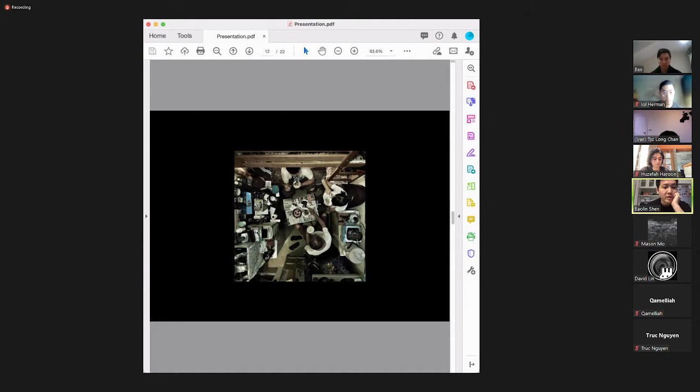And with this dense population of cities, what are the implications? Problems with traffic congestion, housing problems where because of the demand, housing prices are driven really high, and people can't afford to even purchase or live in a comfortable space. People are forced to squeeze into small spaces, as you can see here.

So for us, the studio begins with looking at the problem. First we want to discuss the problem we face within the cities, then discuss what challenges will happen within the cities regarding space, and finally propose a spatial negotiation. In the first place, we really want to look at the dense city problems.

But as we stepped into a more customized approach with the students, with Huzefah, we began to discover that in her own country the problems we're dealing with are slightly different. And then the project starts to evolve. We start to re-identify the problems with the city, and then propose methods and strategies to negotiate with the space. Yeah, and with this I'll hand the presentation to Huzefah.

Hello everyone, I am Huzefah. I was part of Paul and Clark's spatial negotiations prototypes. As we started the course, I reside in Karachi, Pakistan, so it is one of the densest cities, as Paul has mentioned. When we started, overall we studied the city and its density along with its problems.

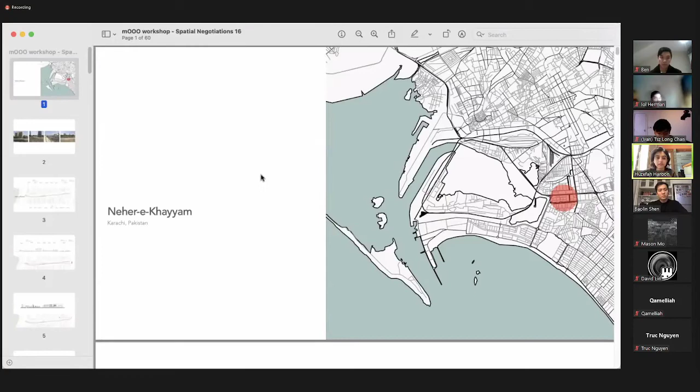So this is one of the areas — this red spot indicates where it is. This was initially a natural drain which goes into the sea, but eventually it started getting dumped with sewage water. There was a project in 2018, held by various architects, to revamp this entire strip of the stream, to box the sewage drainage into a box drain and leave this as fresh water where public interactions can happen.

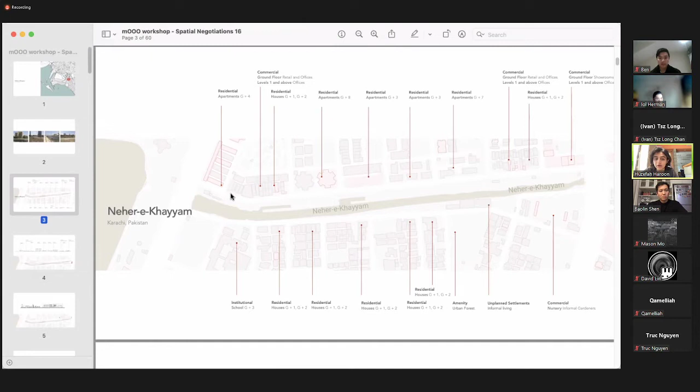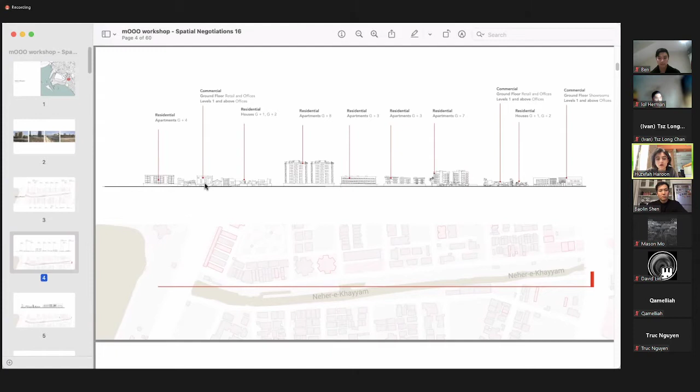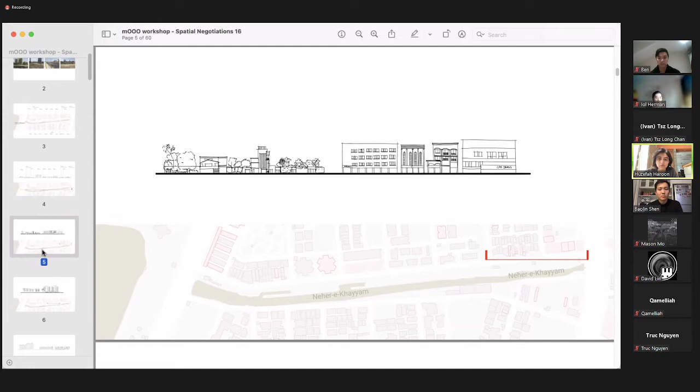This is the current condition of the Neher and the stream along the entire strip. It's a 1 kilometer strip where different multifunctional residential and commercial architecture typologies run parallel to the entire length of the stream. This is the elevation scape of the entire 1 kilometer strip — some housing typologies as well as commercial buildings. The entire strip is mixed use, with residential as well as commercial activities happening along it.

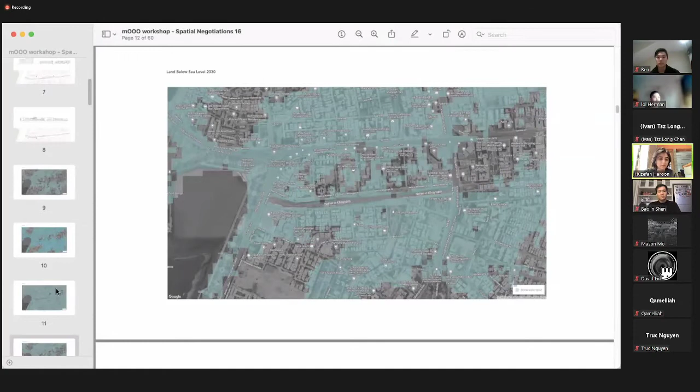This is the land that would be below sea level in the next 9 years, 8 now. This is an image showing the condition of this area during the 2019 monsoon. This entire strip was submerged in water by approximately 1 meter.

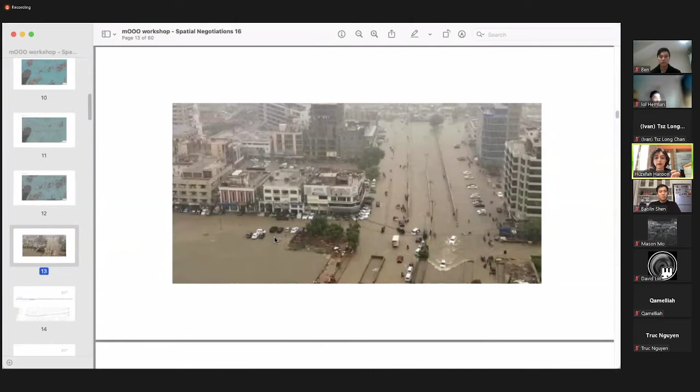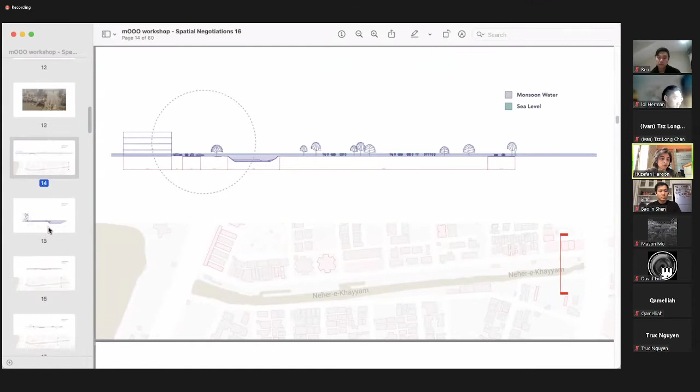This area is blown up to show the activities that happen in this section. This is a commercial activity building where, in each of the cases, the water actually overflows into the buildings.

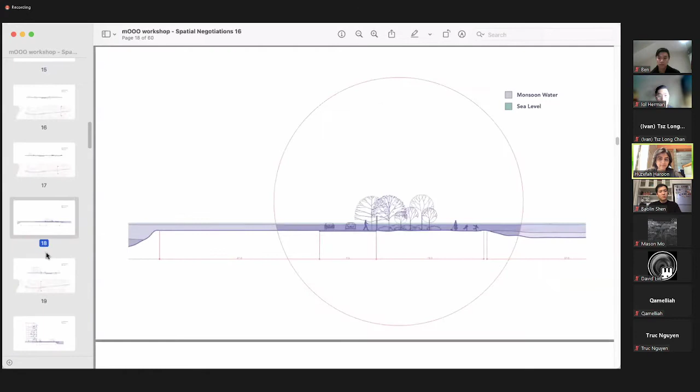So in all of these sectional studies, it was identified that there were 2 aspects happening. One, the housing typology's ground floor became completely inaccessible. At the same time, the overflowing of the stream within the center of this streetscape blocked access to these areas.

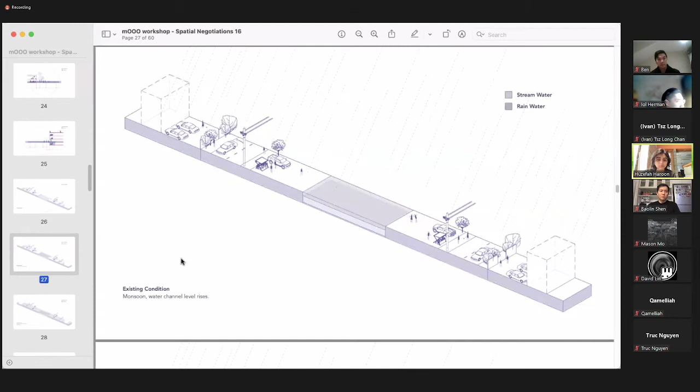This is the existing condition, an axo of how it changes as monsoon happens. As the monsoon starts raining, the water level within the channel starts rising. Also, all the water accumulated within the building areas and the road gets collected within the central stream.

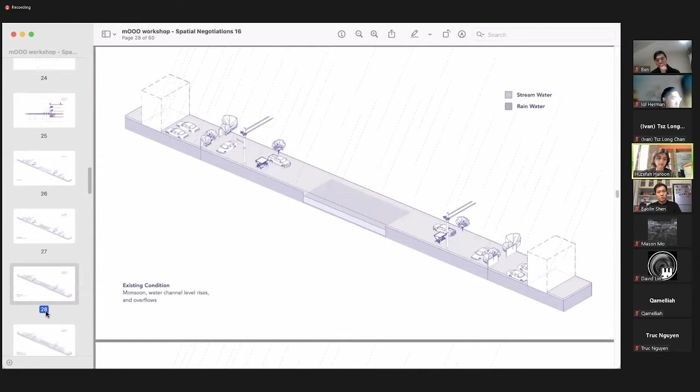As it keeps raining, the Neher gets completely filled and the water overflows onto the roads and private properties, to the point where things become immobile and inaccessible.

So in order to gauge and identify what can be done, there were 2 interventions. The interventions and possible solutions are divided into 2 aspects. One was the landscape aspect.

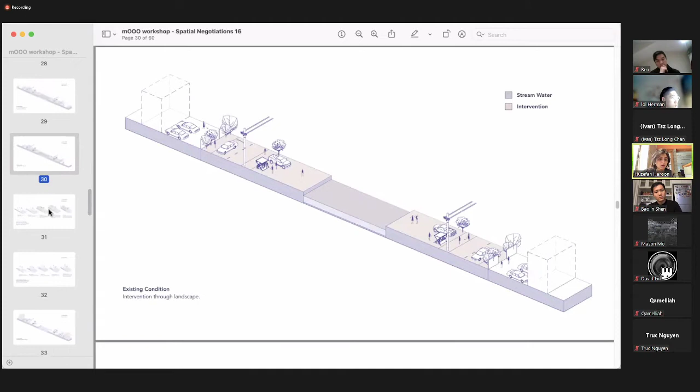Further, the landscape aspect was explored in different ways, looking at possible situations where this can be redone so it acts as a point where public interaction with the water remains, but at the same time also acts as a protective barrier for any water that overflows.

So this is the existing condition. These are multiple ways one can block the water from overflowing into the road, the landscape, and the private property. So a hard boundary is something that can be made.

The other are variations of how landscape can be a softer boundary, where landscape can change levels in a way that creates constant interaction with the water, but at the same time keeps the water at bay.

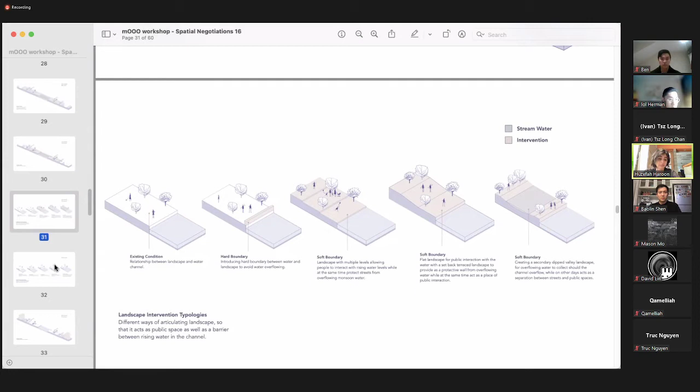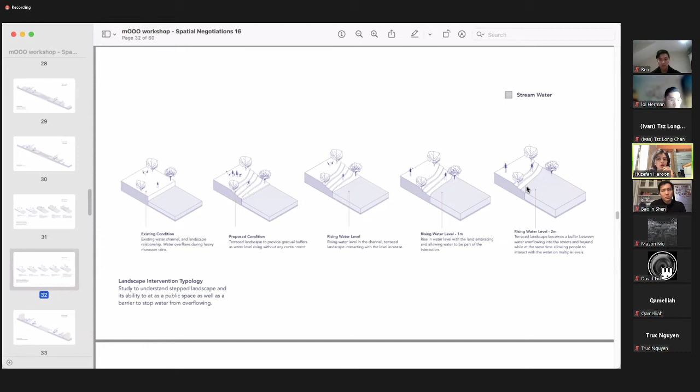So I picked the soft boundary element to develop the iteration of the landscape intervention. This is the axo analysis of how the water, if it keeps rising, gets blocked, but at each level as the land recedes and the water overcomes it, there's still retention of public interaction. At the same time, this water doesn't overflow to other areas of the street.

The second intervention identified was the housing typology and how that can be redesigned or rethought in order to keep it accessible. While the monsoon condition is temporary, rising sea levels are something that still need to be thought of, and how it can remain accessible while the ground floor level can still be used.

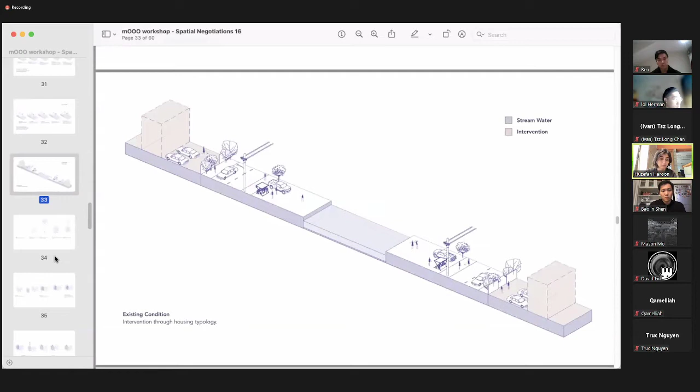So this was an understanding of how a mass can be broken into structure and volumes, and how circulation can be separated from it, where the circulation becomes like scaffolding, flexible enough to change with the times, and functionality can be added to it.

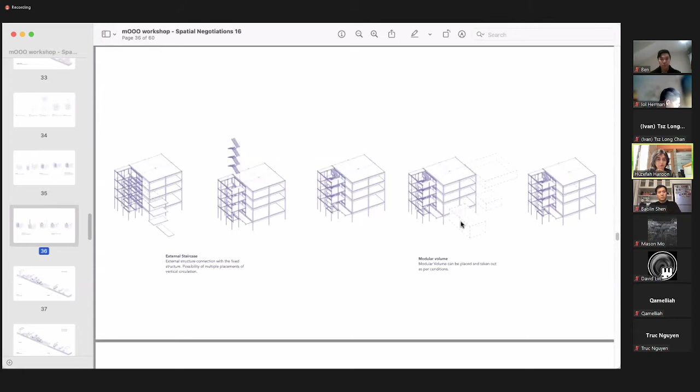So it's a plug-in system where volumes can come in according to the requirement. Let's say if half of that entire square feet is needed, it can be plonked in. A quarter of the space can also be used, and the full floor can also be used. So this was an understanding of how the housing typology can be thought of.

But housing typology itself has been identified, with the roof being the one factor that can be explored - if we lose out on the ground floor function, can the roof be activated to perform the function that the ground floor is performing?

At the same time, because there is no rainwater collection happening, a lot of water gets accumulated and wasted by collecting within the central stream. So maybe some kind of storage can come in within the housing typologies to reuse that fresh water.

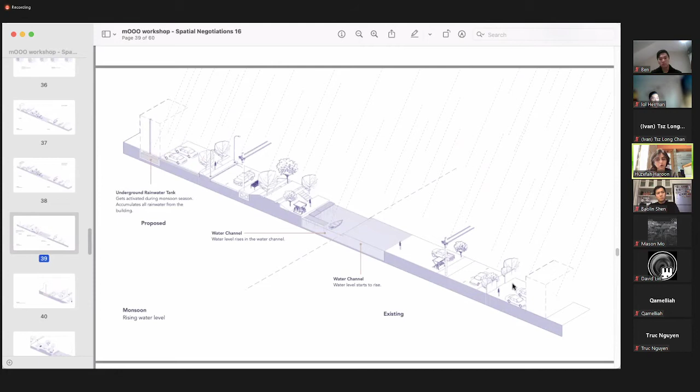At the same time, in the existing condition, the water level is rising faster because all the rainwater that gets thrown onto the road and the building gets accumulated here within the stream.

So these are just some activated areas further zoomed in, showing how the water keeps rising as the monsoon happens.

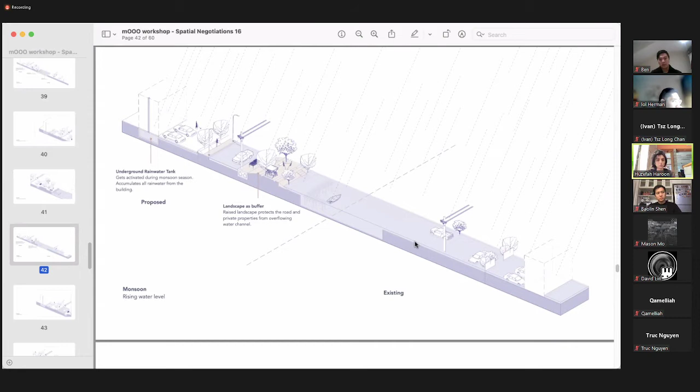This is where the storage tank overflows, but at the same time, this water starts getting over the landscape slope that's there. In the existing condition, if these interventions weren't there, the road and the private areas would still be inaccessible.

This is one of the last final resorts for the monsoon. So in case the road also gets overflown, the scaffolding system can come in where a sky bridge or a walkway can be made, whereas monsoon emergency barriers can be blocked so road water doesn't come into the property areas.

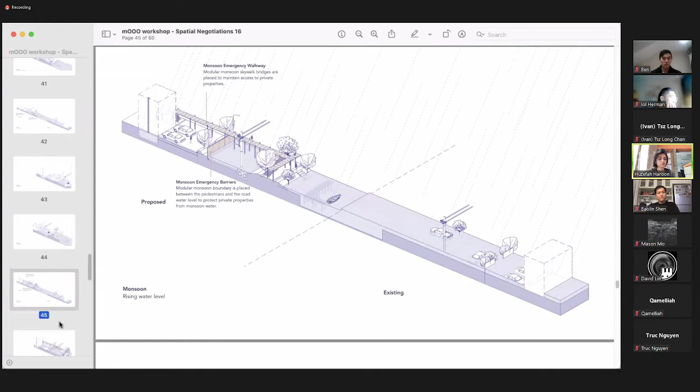This is an overall strategy. So with changing time, the interventions need to allow for changes and flexibility to happen over time. So all of these highlighted areas, such as the pier, are introduced in larger forms of steps.

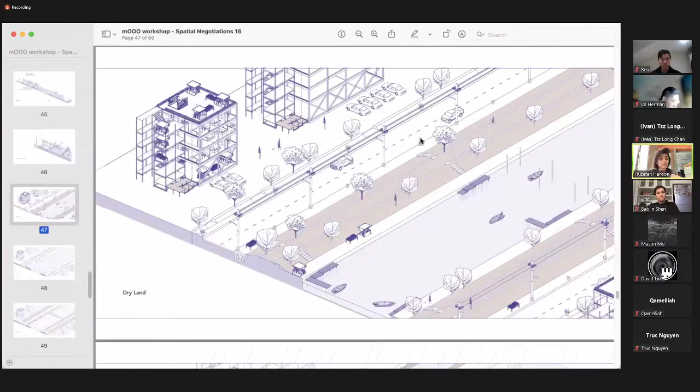Which can act as platforms for the boats to come in eventually at different levels of water as it rises. At the same time, these areas, which are the foundation supports for street lamps and posts, can alternatively act as seating elements in a dry land situation, and the landscape acts as an interactive element.

As the situation further changes in monsoon, again, the emergency barriers can come in and get activated. Once the sea level rises, a lot more long-term situation is needed.

So the roads and the sky bridges become an elevated area where interaction can stay, while the mode of transportation primarily now becomes boats. And this staggered pier acts as a platform for people to still let the building be accessible.

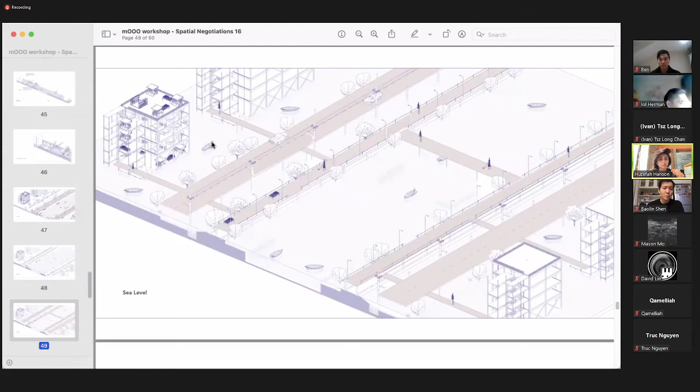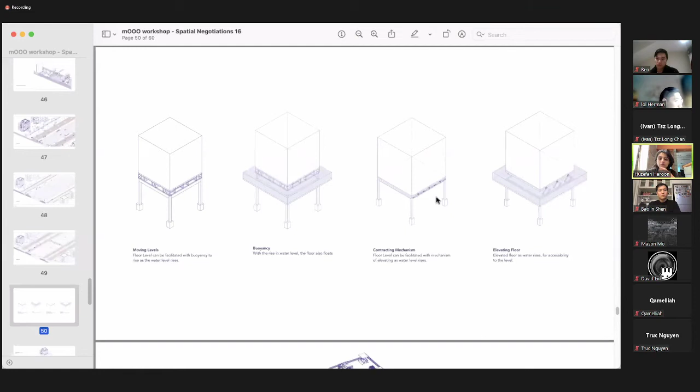This was a further intervention into how one can also keep the ground level accessible to some limit. So what can be those mechanisms which can lift the floor level as the water comes in. So these were the interventions that were thought of.

This is the housing typology, where the roof gets activated again. This flexible vertical structure becomes an area which acts like a vertical streetscape.

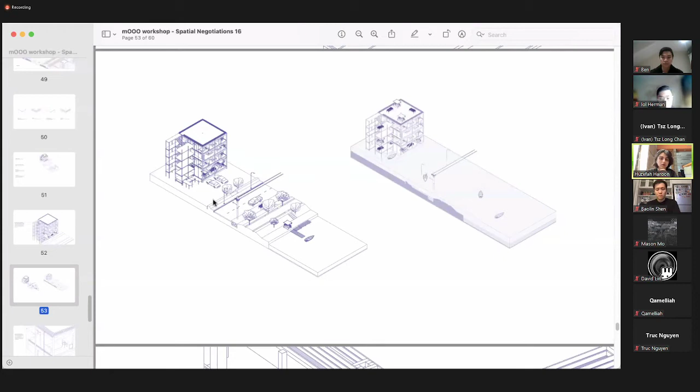This is a comparative of how the dry situation changes as the sea level rises, and how the ground floor gets lifted as the sea level rises so it remains accessible. This pier gets submerged, but there's still this platform which can be accessed by boats.

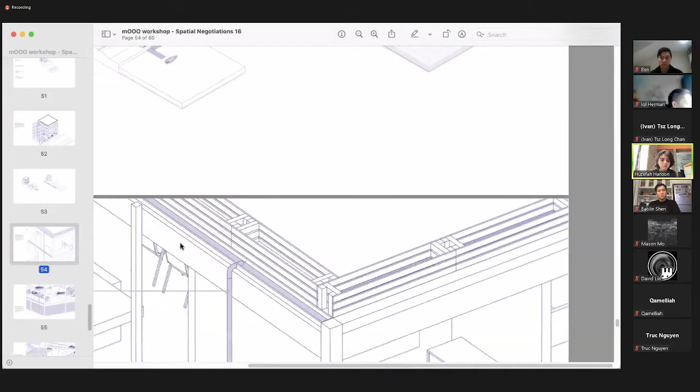Then this is the water collection system, where it gets stored in the tank underneath.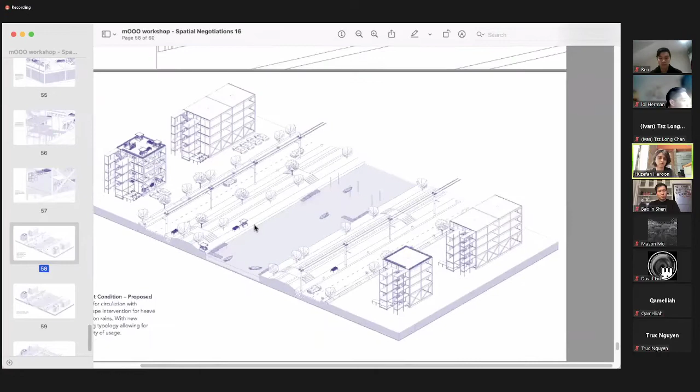This is the overall scheme, which shows the proposed current condition within a dry situation, what happens when the monsoon comes in and rainwater accumulates, and how the entire fabric of the cityscape changes as the sea level rises.

So this is the research that's been done so far. Thank you.

It's great, yeah, great project. Great presentation.

So basically what we did is more of a research project that we chose. We began by trying to identify a very local problem within Karachi, where Huzifah lives, and then slowly narrowed down the landscape until we decided to focus on one section strip, where you can interact with the water, with a bit of housing, to really focus our attention on the design.

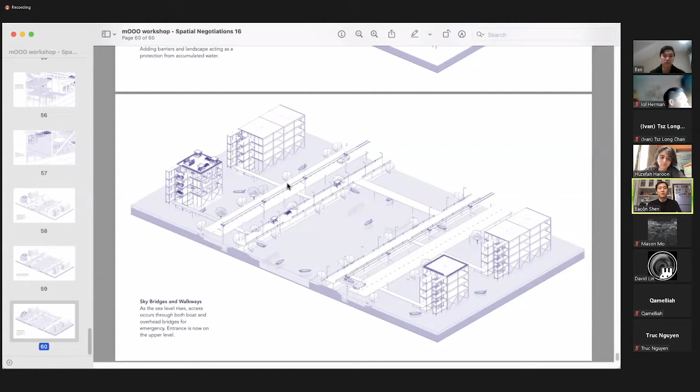And then there are two approaches we've shown here. One is more of a framework, landscape part, where we design how the bigger landscape interacts with the changing sea level. And then the other portion is more focused, on how the residential component is also a flexible system that deals with the unforeseeable changes in this changing future.

And at the moment, I think we've really set up the framework for the research, where each portion can be focused on further, to go into more detail to resolve the kind of details where we talk about flexible architecture or flexible structure, how things can interact with each other. Yeah, I think that was our research framework and goal.

Let's see if any other tutor has comments.

I have some questions for you, but I can wait till the end. I have some questions as well, but I'm sure you have looked at it.

So have you guys also studied floating structures? Structures that will float when the water comes in. They're smaller scale, but anchored to the ground.

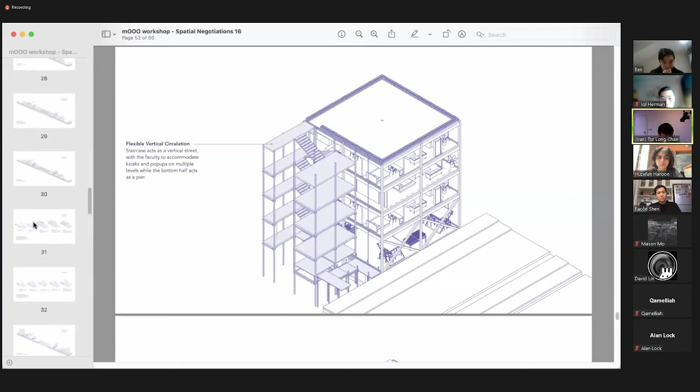Also just a few questions. I think the presentation is really clear, I got the idea, and the drawing is pretty clear as well. But maybe you have it in the beginning, which I might have missed, but maybe it's some data, like how high the sea level will be, the water level when it's flooded. Maybe you got it already.

Let's say if you have all these buildings which almost serve as a water tank for the water to come in—I know you are just focusing on one stretch of area, but it might be good to look at the whole area of the city as a whole, and study: if all these buildings become a water tank, when the monsoon actually comes, can you absorb all the water? You don't have to design everything for the city, but it would be good to have a number to see how plausible the scheme is.

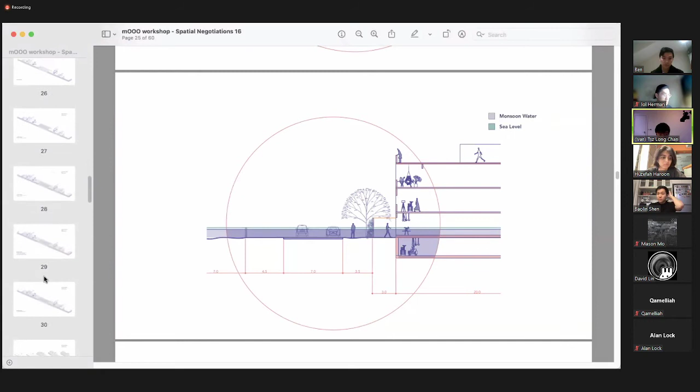And then also the idea of time, because you mentioned monsoon, which only comes maybe in the summer or something. So what happens to the landscape when it's not flooded, how do people use it? Do you have to do anything to prepare for it? And even with global warming and sea level rise—what happens, let's say in 50 years' time, when the water level becomes much higher, how does the city prepare for that? I think this kind of question can bring more to the design proposal of the project.

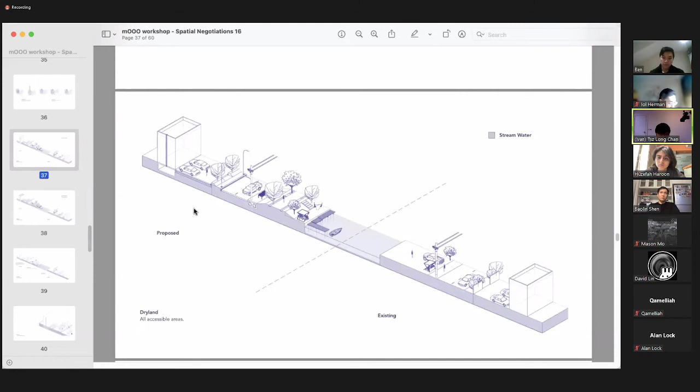I think it would also be nice—I know you're focusing on this specific stretch of area, but it would be quite nice to see the whole stretch of river and how this landscape merges into the water, and whether that's part of the landscape where you allow the water to come in and become part of the landscape as well. So yeah, I think that's my comment.

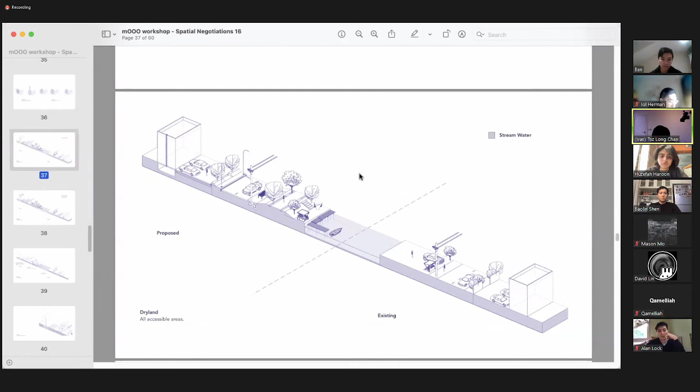Also the platforms—I think it's at the very end of the presentation, where you have these little platforms that allow people to walk on. I actually think this is really beautiful, and it almost reminds me of Venice when it's flooded, where you can see people rushing out into the city and using these platforms to get around. Because when it's flooded, people have to walk on those platforms, and it's quite interesting because they're actually quite narrow, only allowing two people to walk by each other at the same time. Sometimes when tourists are holding a suitcase, they can't walk past each other, so one person has to actually go down into the water and come back up again. I think this little nuance of moments is quite interesting as well.

So the idea is also, even the width of the platform—how wide do you think this platform will have to be? What determines that? I think that would be quite interesting to see. There's a lot of different details you can add on to the design to make it even more precise and rich.

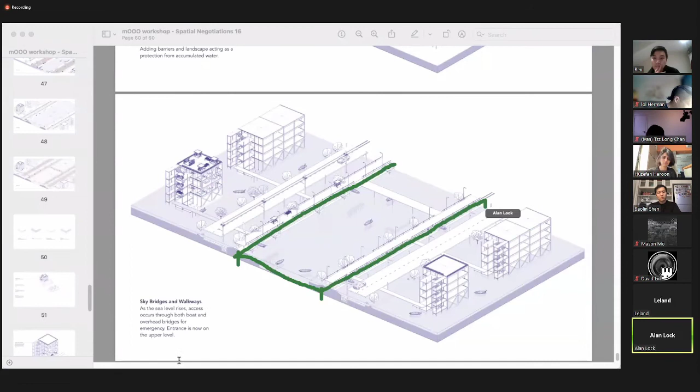So your narrative would be: when it floods, all the water that rises into our streets isn't clean water, it's basically sewage water. It's mixing with everything, becoming black water, and flooding our streets. But how do we stop it from flooding our streets? The current condition of this channel could suggest a way of combating it.

Using sponge city theory—basically, if you populate this like a green finger with lots of different foliage and plantations that, depending on your research, might have both water absorption qualities and water purification qualities, then if any water does spill out into the street, it won't be completely chemical black water. It might have some water purification properties. That's a way of combating it.

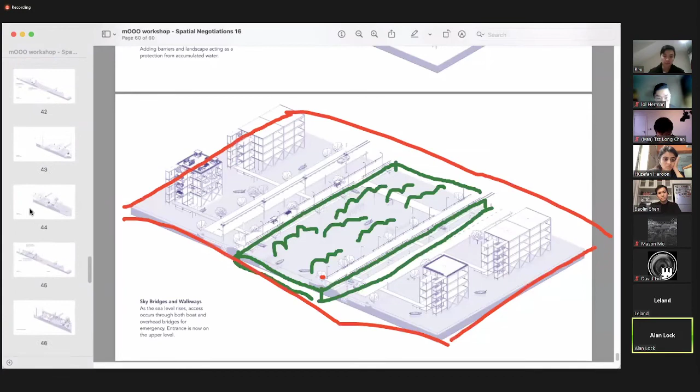You set up the whole project to say this little green thing we've put here isn't going to save the whole planet, but for this area, this 1 kilometer area, it could potentially be enough to stop flooding there. That could be an option for combating the flooding, as opposed to just accommodating it. Then you take all the options you've done where you think it combats the water and put it into a separate section.

So you open your presentation by saying it's a feasibility study filled with options. You can either accommodate it—and these are the options—or combat it—and these are the options. Then I think you have a great rounded project.

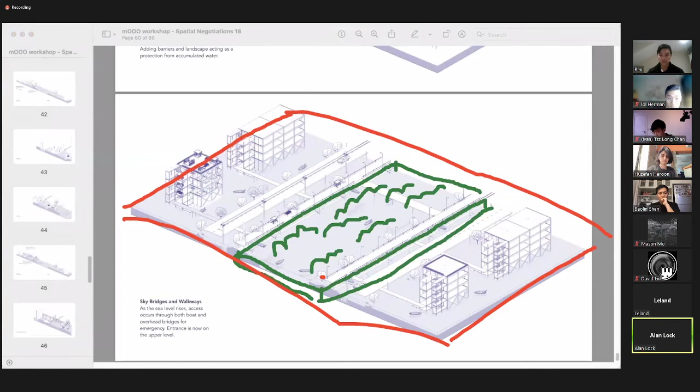Yeah, okay, I'm sorry, I forgot to mention that for the sewage water, box drains have been introduced here, so the sewage water doesn't get collected within the central stream, keeping it filled with only clean water. All the sewage water gets channeled within a proper system, which right now is lacking. So I forgot to mention that, sorry.

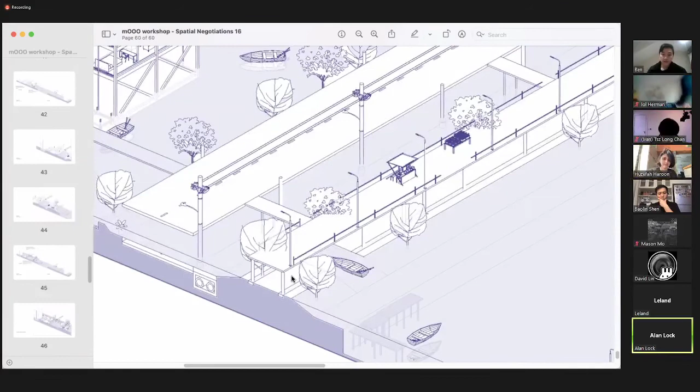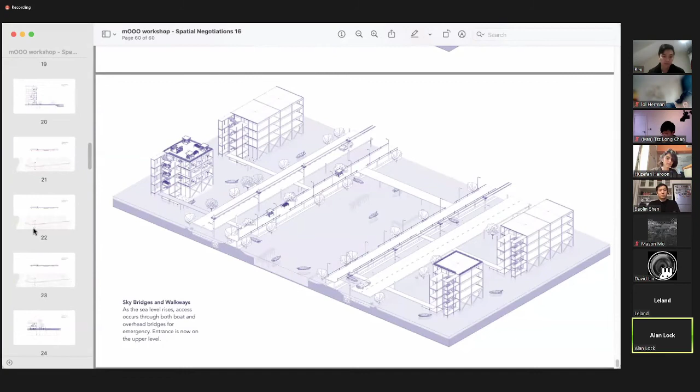But there you go—so already you open up the discussion by saying these systems already exist, but they're not super functional. One thing we could do is X, Y, Z. Therefore, the systems you put into place are not completely redundant, but they need support. That's what I think. I think if you go back to the photos you showed at the very beginning, you can't ignore the fact that the current condition is as it is. That's the current condition.

Depending on the level of flooding from year to year—and it's only for 1 or 2 months during the monsoon season, however long it is—you could start to play with other alternative options. And like the rest of the tutors were saying, maybe the interactions change from year to year. So yeah, I think it's a great project.

I would lean into the fact that it reads as a feasibility study. Okay, yeah, I do agree. It's a very good project with solid research and a proposed solution, and like Alan said, it's very, very close to being a complete feasibility study, almost like a proposal for how they could tackle flooding.

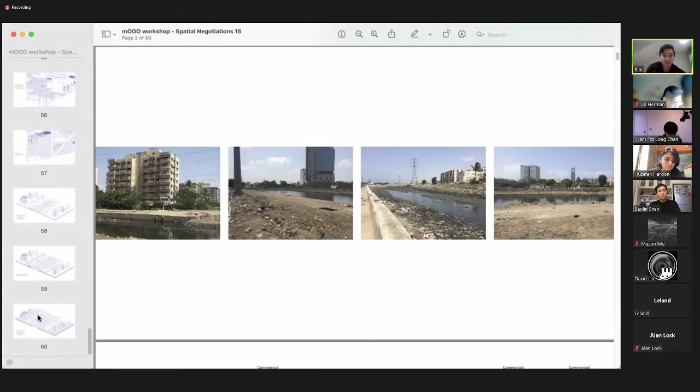I think to make it even better, you need more alternative solutions. And what Alan suggested, Sponge City, makes a lot of sense because plants absorb a lot of water naturally, and they sort of level out the flooding a bit.

I also want to address Ivan's earlier point about needing more data to support this and make it better as a feasibility study. So there's data showing global sea level rises by 3 to 4 mm per year—I just Googled this—and you could use this number to account for every 250 years, the water level rises by 1 meter.

And during monsoon seasons, it's way worse. You could take the whole area of the country, multiply by the water level changes, and get the volume of water to determine how much water tank capacity you'll need.

Right now it's almost like building a bucket around and inside this country. I think there are problems with this solution—it's a long-term fix that might work for a few hundred years, but over a super macro timescale, it becomes like a giant hole in the ground as you have to keep adding more water barriers around the country.

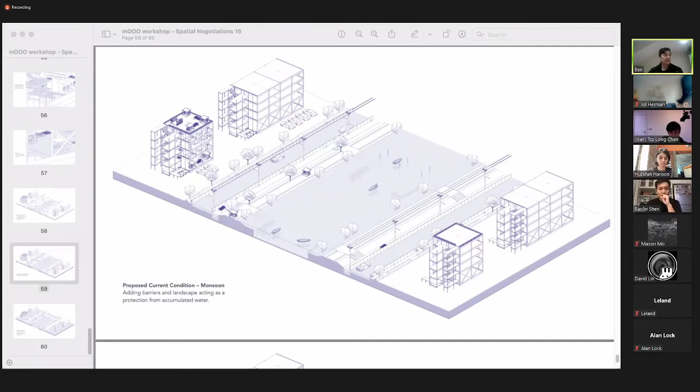So it's almost like building another layer of the city on top, by shifting the ground floor of the whole country by maybe 1 or 2 meters, and then slowly phasing out the existing ground floor as the existing first floor becomes the new ground floor.

I have a question regarding this. If the overall sea level relative to Karachi isn't that high, especially within the immediate land connected to the seashore—what's happened in recent development years is that developers have reclaimed land, adding land where there wasn't any before, bringing in islands where there was sea, which has created even more chances of flooding sooner than it would have otherwise.

This is also something I was debating—how much of the area can we actually increase the level of? Because on a larger city scale, wouldn't it be a lot costlier to raise the ground level from the sea? So in that manner, it became more feasible for us to consider accommodating the changes rather than combating or protecting the land, creating barriers, or prolonging the changes that may happen.

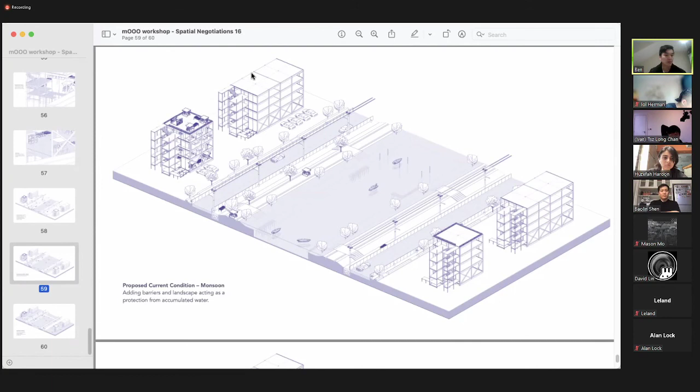If you've done the study, it would help to list these as solutions and explain why you ruled them out. So, how much soil would you need to raise the whole country by 1 meter, and you could say this much soil would destabilize the coastal area, so it's not feasible. If you include that as part of the study, it will add more depth.

Yeah, because you have already done the work, so present it. Where did you get the soil from? Just out of interest, where are you gonna get the soil from? Do you know? Is it gonna be from the building? Like if you strip off the ground floor of the building cladding, can you use the cladding to become almost like this soil?

So I think what I'm interested in is, because I think your project suddenly becomes very real, and I like the idea of Alan's idea of this sort of feasibility study. So I think this data and the numbers is really important for you to actually present to your audience, and to make it really plausible, because you're dealing with very real issues, and you're actually thinking about how you can address that.

So in a way, even looking at the buildings, like where you said you're gonna put in these water tanks and everything, so what's the fabric of the building? Can you actually use the fabric of the building to become your soil, for example?